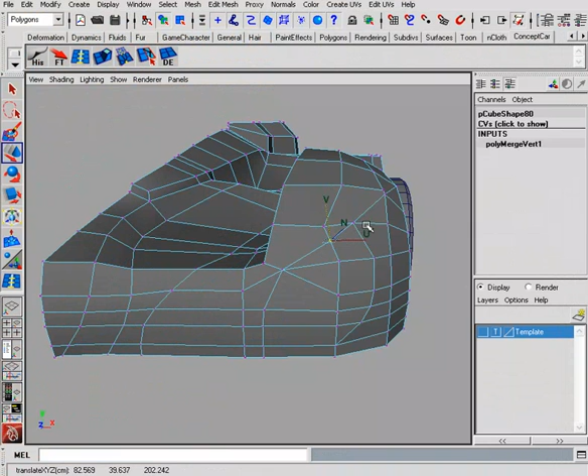We can kind of move some of these points over, not worrying too much right now about the topology. When we do our inset, we can work on that topology a little bit more. Let's go ahead and move these points, space these out a little bit more along here.

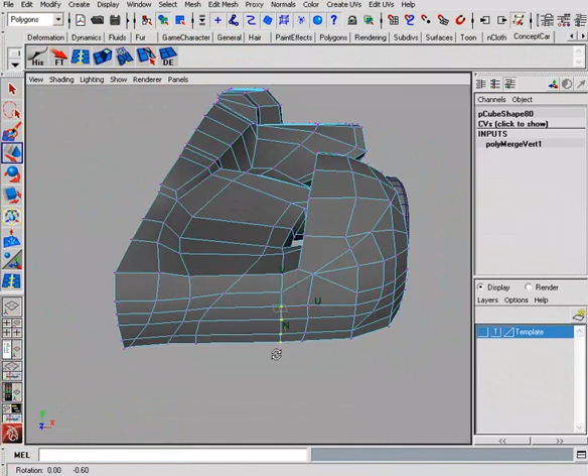Let's go ahead and take these points right here, and we'll just move those over. Let's grab our world axis and just move those over here, so something along those lines. Just spread those out a little bit more.

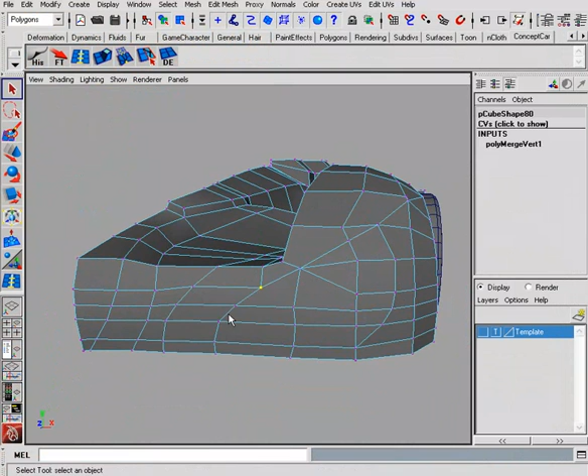So you can see we've got a little bit of weird geometry going on in here, but we'll be able to come in and change that up later. Right now all we're worried about is the outline here, this outline coming up here, and then the outline of where we're going to have the headlight coming in as well.

Let's go and pull this down a bit, just kind of shape that out. We may need to come in and add some more resolution here at some point.

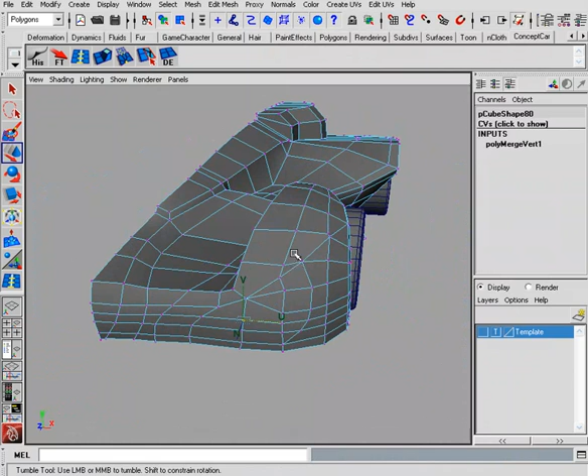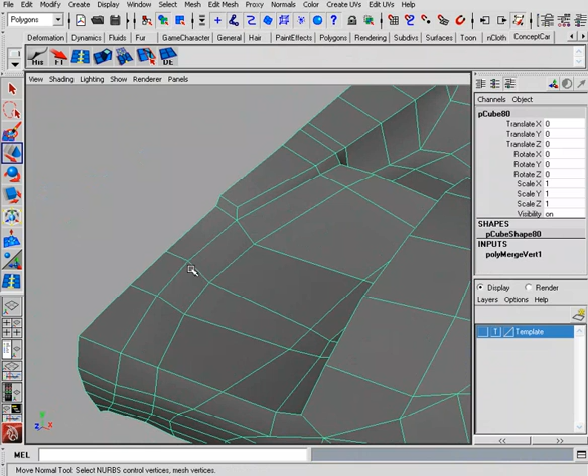Let's go ahead and start to add some resolution, because if we smooth this right now just by hitting 3, you can see it's just a big blob. So let's start to add some lines, and we're going to concentrate on the lines we've already decided on—not necessarily the A line, since that's just the profile of it and not an actual crease on the car—but things like the belt line and the shoulder line that we've already talked about.

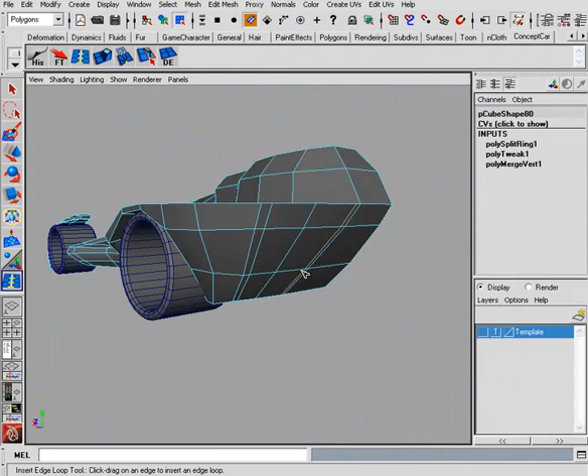So let's go ahead and, using our insert edge loop, start by bringing in some lines across here. If you look, you can see that goes all the way across and over here, and that's going to serve to hold the shape when we smooth this, so it won't be so blobby.

You can see where it's got a gap here because we don't have this cut off. That's okay—if we have anything we need to fix later, we can leave that on the bottom and then reroute that as needed.

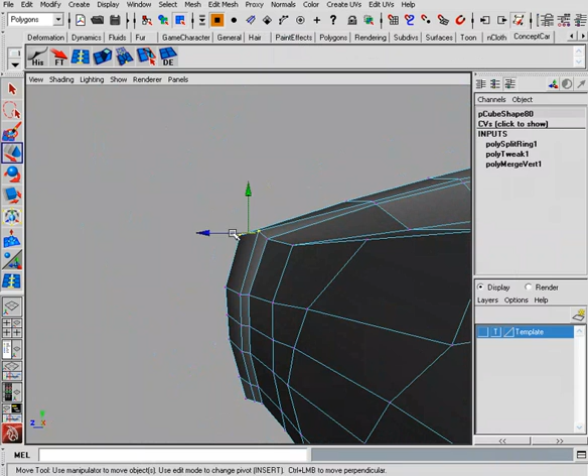Okay, so we'll go in here, and right up here I want to grab this line we've just created and just kind of pull it back a little bit. Because up here I want it to define a little bit more of a shape, rather than just being there to hold the shape when we smooth it—I want it to actually start to define more of this bulge coming in here from the front.

So I'll just grab these points and shape those as needed. As we add this resolution, it's good to be aware of where that resolution is actually going, because it's not going to be necessarily isolated to where you've dropped it—it might end up someplace else, so you need to be aware of that.

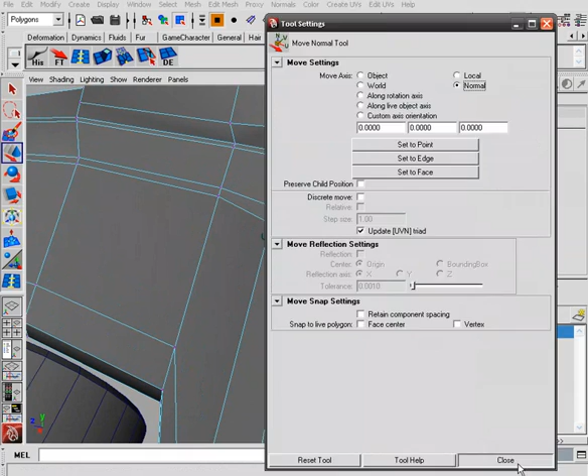So let's go ahead and drop that line right in here for that shoulder line, and in some places it may be a little bit farther apart, so we can come in and just move those together in certain areas.

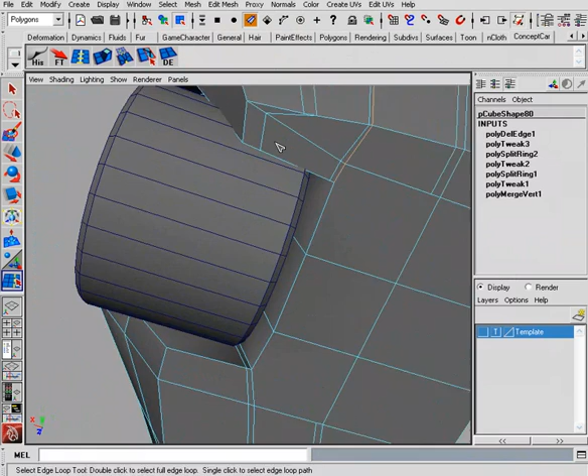Okay, now up here we don't necessarily want this line to continue all the way up here. We want it to spread out. So what we can do is take one of these lines, just pick one, and delete this one. Then let's select the edge loop tool and select that rest of that loop.

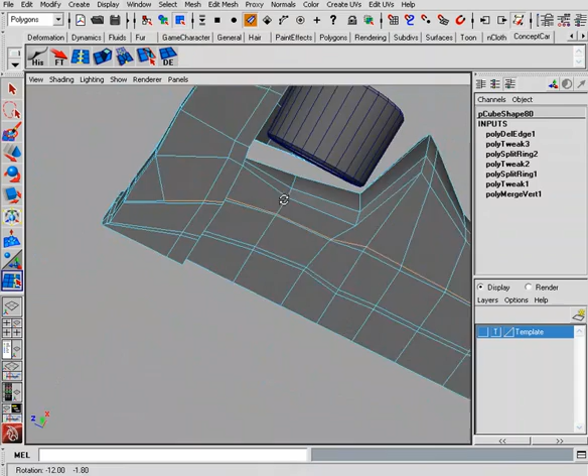Go ahead and undo that. Let's actually pick this one because of the way that it connects down underneath. You can see that's going to be a better one to pick, and you can see where that goes up here. So we'll go ahead and delete that, and you can see how that's left us with some geometry up there, but that's okay.

So now the idea is that we want to spread this out. Let's take this point and we can just move it over here. Bring that point, space that out a bit, and even up here we can start to do that. Then we can bring that edge back in, spaced out, and so now we've got it sharp up here and then spaced out up here.

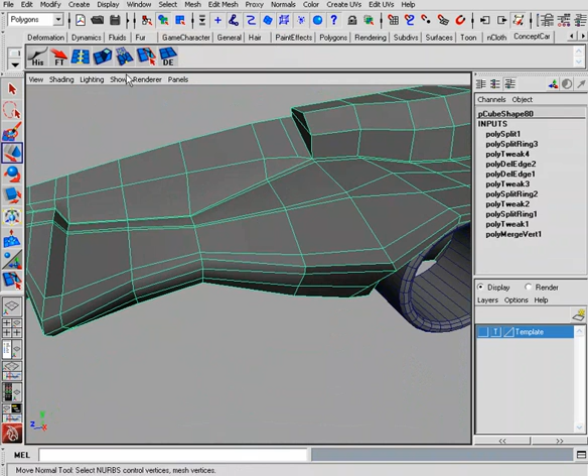Let's go ahead and add another edge loop going along this way so we can define our shape a little bit better, coming across here. We'll just select all of these and work on the plan shape from the top, kind of smooth that out a bit.

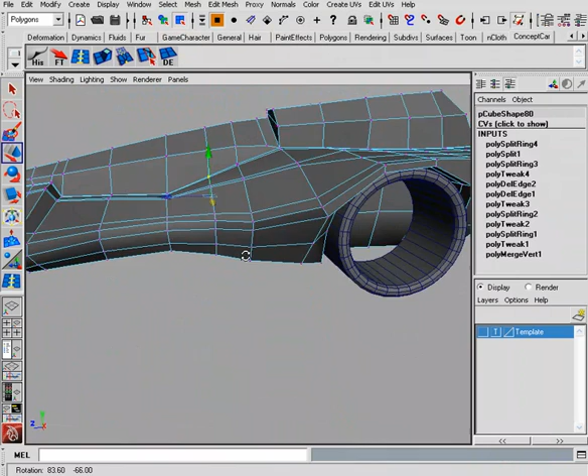Okay, and you might want to space this out. So what you could do is add an edge loop right in here, and then you could delete this guy if you wanted to. Make sure you've got everything else unselected. Go and select that guy and delete that, just so things are spaced out a little bit more.

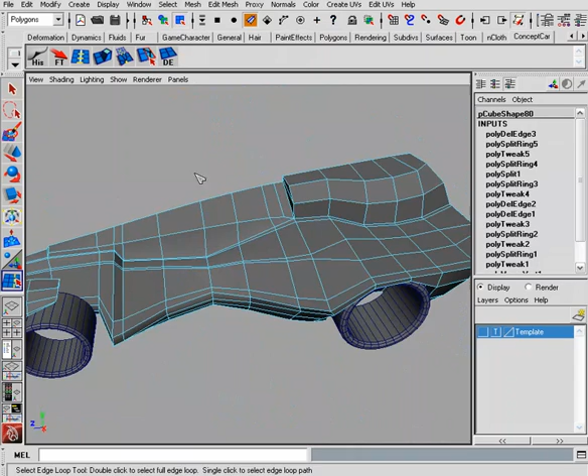Okay, so you can see where it's starting to get defined. We only have 2 edges right now, so that's going to give a little bit of sharpness, as you can see. But the more edges, if you have 3 edges, it's going to give you a nice, really sharp line there.

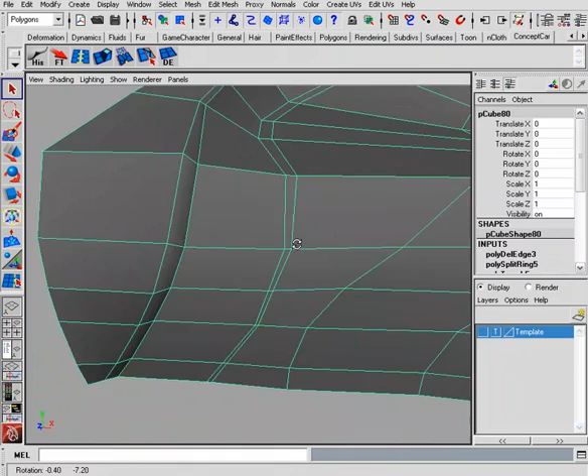So if we go ahead and add another edge right here, that'll give us something nice and sharp. And then we need to do the same process of spacing these out. Yeah, that gives us a nice sharp edge. But we need to go through the same process of spacing these out up here.

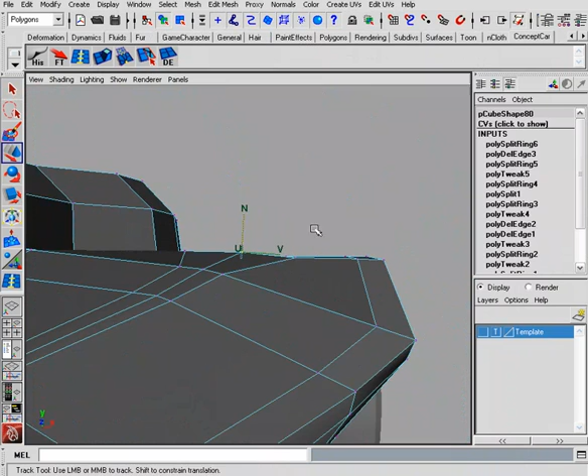And we can do that just by grabbing these and spacing them out like this, kind of in that way. So we're trying to maintain this curvature that we have here. So we'll just kind of space these out.

And then all of these are flat, so if we wanted to, we could just snap those up to a plane from the side.

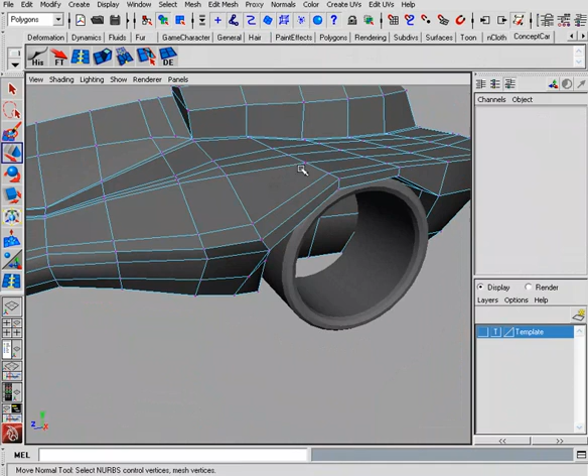Alright, so now we're starting to get some more sharpness in here. We can also start to add some sharpness around this direction. You can see where that's going to go all the way up and around here. So anytime you do this, you're going to have to deal with some of this resolution. Now in this case, this is definitely what we want.

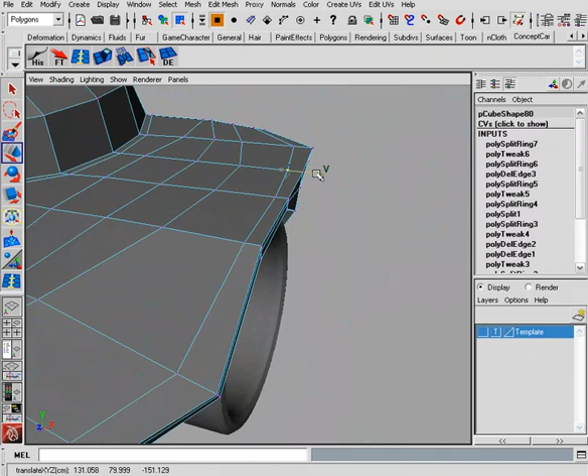We want to pull this up nice and tight. Let's go ahead and pull these across, and we can get those kind of tightened up against that edge so that we have a nice sharp edge when we go ahead and smooth this out. You can see we've got our main edge defining that, and then we've got a couple edges here to hold that geometry, so that when we go ahead and smooth that, you can see it's starting to get us a sharper edge.

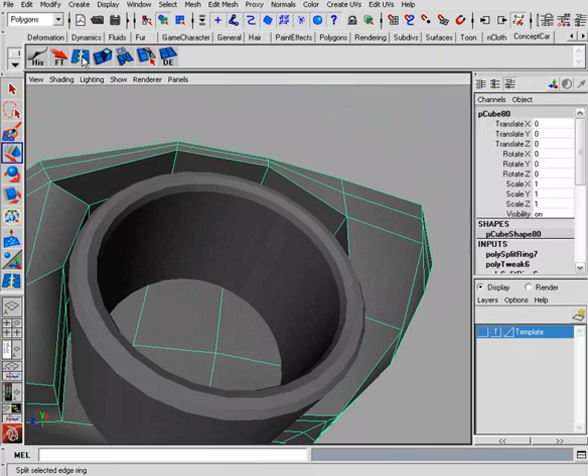And then we can again add resolution under here for that bottom edge. Okay, and you can see where that geometry is starting to go. You can see where I've added an edge here. It's gone all the way around, but in this case it's kind of found its own way because of how the geometry has been created.

So in this case, one of the things I like to do is sometimes just cut things off so that it doesn't have anywhere to go, and then at a later point we can come in and really decide how we want to redraw that. So I'll just cut that off at that point, and the geometry's fine going under there.

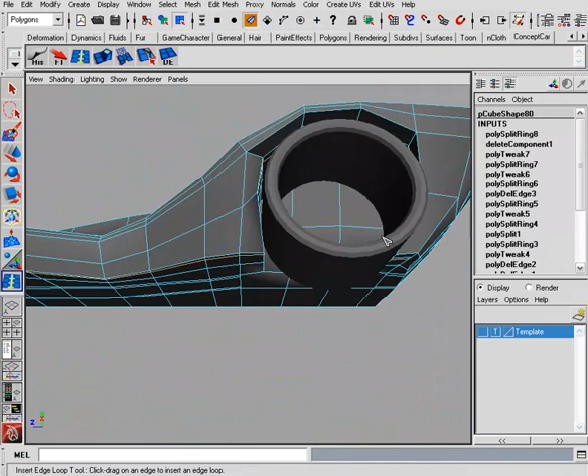Actually, we want to bring it right up here. That's where we want it. So now when we smooth that, that's going to be a little bit sharper. And we may need to add some thickness in here as well.

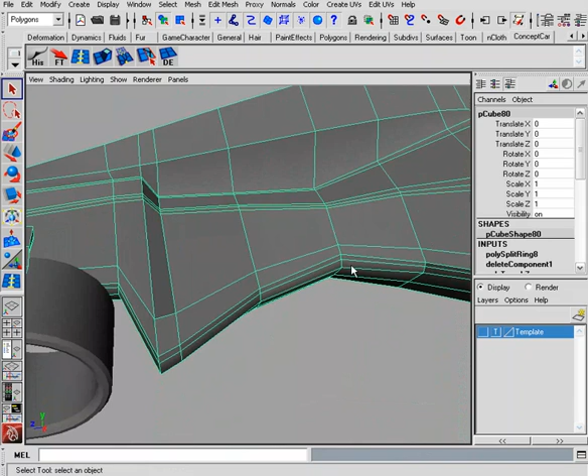Okay, so just go along and start to add some resolution along your main edges. So we've got this main edge right here, and this one as well. Okay, so we just want to come in and start to add edges. 3 is going to give you a nice tight edge. If you don't need something quite as tight, you can have 2, and you can kind of work on the spacing depending on what kind of hardness or softness that you need for your edges.

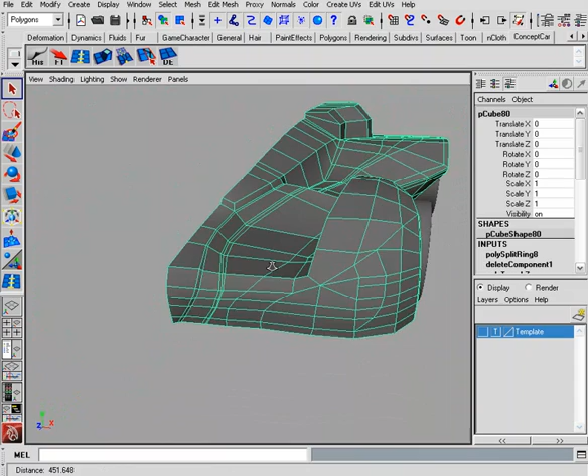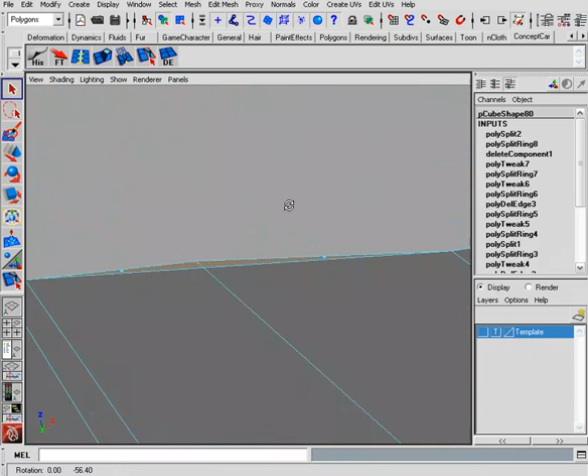All right, and also just be aware of where those edges are going. You can see that we've got now an edge up here that needs to be connected up, so I can go ahead and connect this up here. You can see we've got a little bit of geometry right in here. We can just delete those and then merge those together, and then we've got one line here that needs to be completed somewhere.

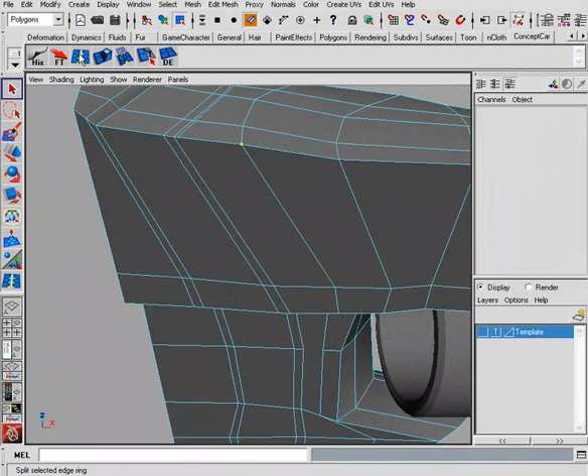So again, one of the things I'll do, you can see how this goes all the way around. If I don't want that to happen, but I do want to kind of continue it so I can figure that out later, I'll just kind of cut off a piece right in here, draw that in, and then connect it up. And try to accumulate all of our spots in here where we don't necessarily have everything connected, and we'll come in and connect that later.

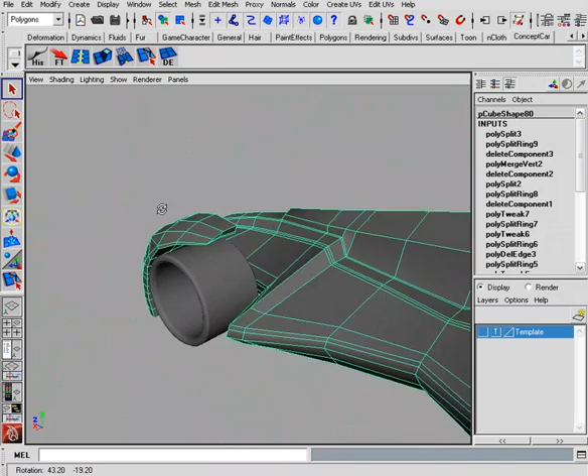We're just trying to block things out at this point. Get these kind of creases lined up in here. You probably also want to add a line across here, not only to hold this point, but also to give this a little bit of a sharper edge right in here. So that's nice and tight as we come across there. So that's also something to think about.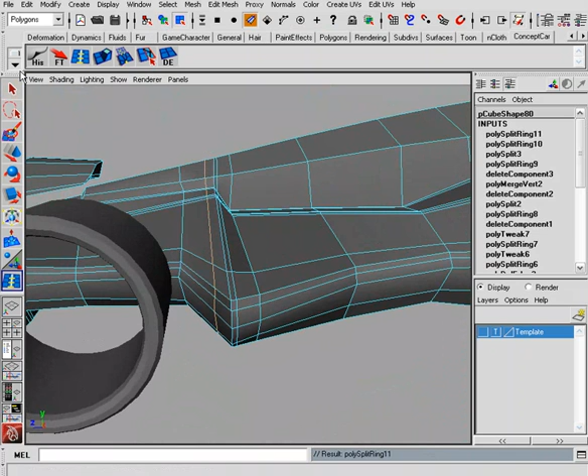You just smooth that out, and you can see that's going to be the edge of our canopy. So eventually we'll have this sort of cut out. But you can see where those sharp lines are starting to come in, and we haven't really done anything, but it's starting to look really nice coming through here with these lines coming up and across the front. We're starting to get a nice look up here.

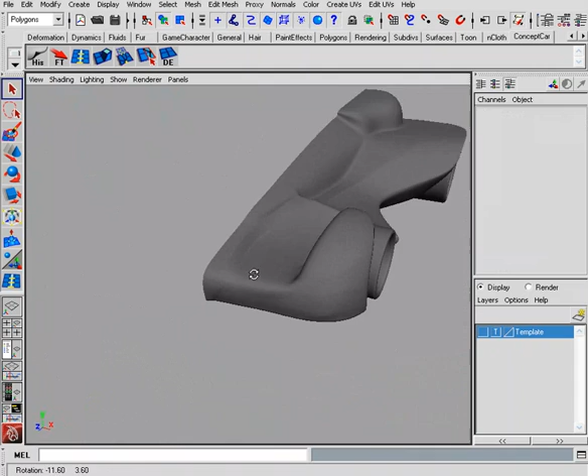So let's go ahead and come in the next lesson and start to refine our shapes and start cutting some of these panels apart, because you can see that we've been running into a lot of times where we're adding resolution in specific areas, and it's being carried around the whole model, and it's becoming a little bit more difficult to keep a handle on where that resolution is going. And again, as we talked about, that's one of the issues we're going to run into when we start box modeling something like this.

When we start adding resolution, it's going to start going in different places, and we're going to have to start really taking care to isolate the areas that we're working on, and not lose track of where that geometry is going, because you're going to find you have to go back and fix things. And you saw how it's getting to the point where we're having more and more of those areas.

So if we cut some of these pieces apart, we can then isolate any sort of resolution changes that we make to that particular piece, and we don't have to worry so much about the resolution kind of going in areas that we don't want it to go. So anyway, we'll go ahead and start to do that process in the next lesson. We'll continue on with the car then.